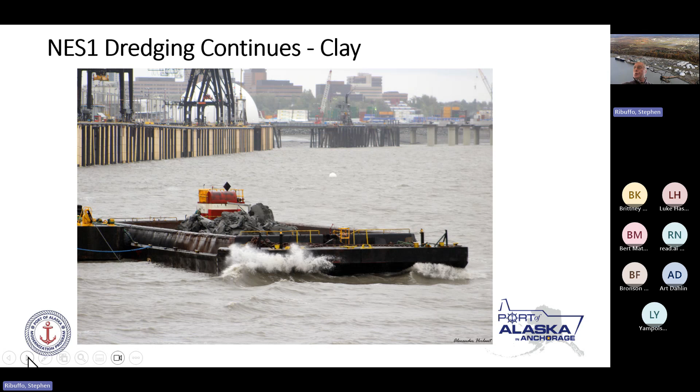Well, can I make a comment and ask a question? Can you confirm whether once this is done, it falls to the Corps of Engineers to maintain it at those depths? The Corps will maintain their area, but not necessarily what this is. So the Corps has a limit line, and the Corps maintains that line, but it doesn't go all the way to the shoreline. The navigation channel is where they will continue to maintain, but they don't go right up to the shore. Next slide. I should have asked it better.

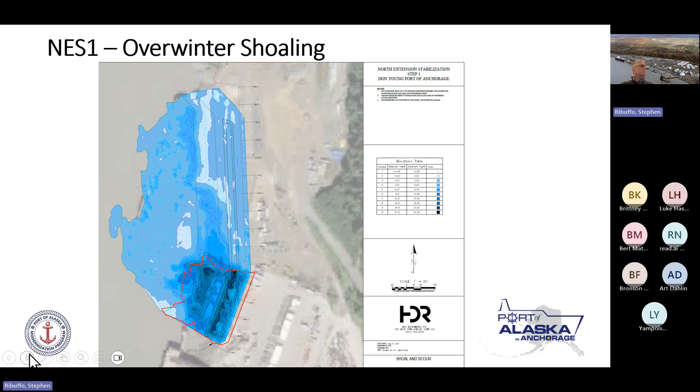Okay, next slide. So T1 schedule—here's a cute little picture that WSP put together for the T1. That's what it's going to look like when it's done.

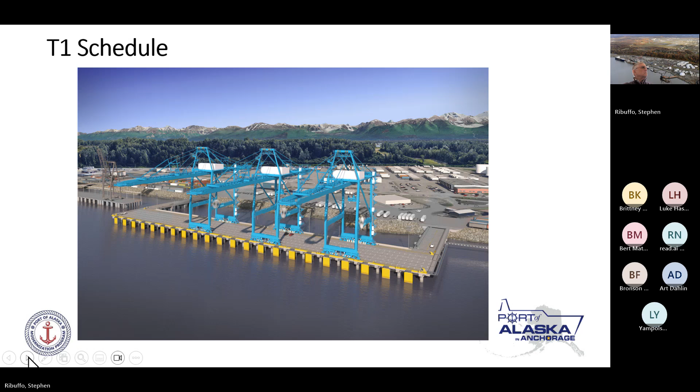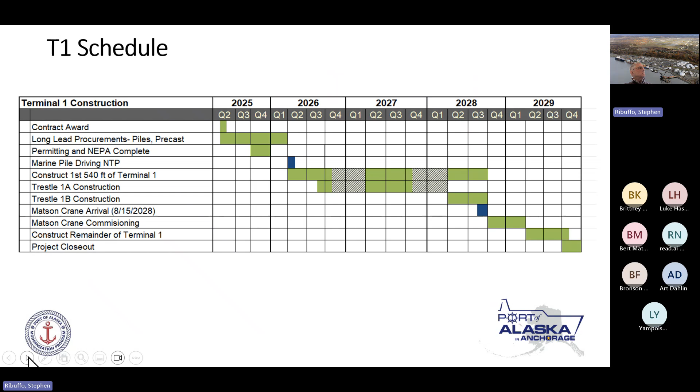We kind of talked about this already. This year we're doing submittals and ordering materials. Q2 next year they're hoping to be up here driving piles, and then they work for basically 4 years. Rough outline of that. Next slide.

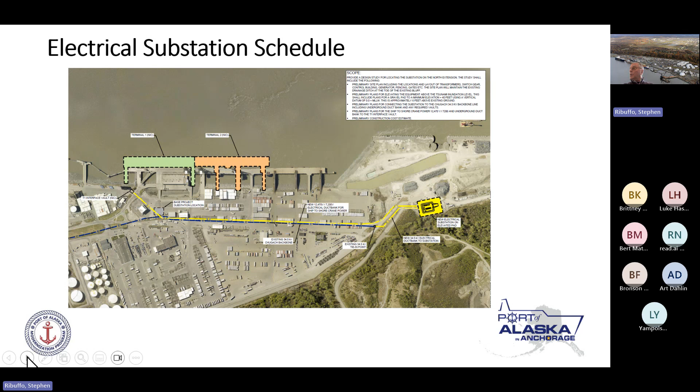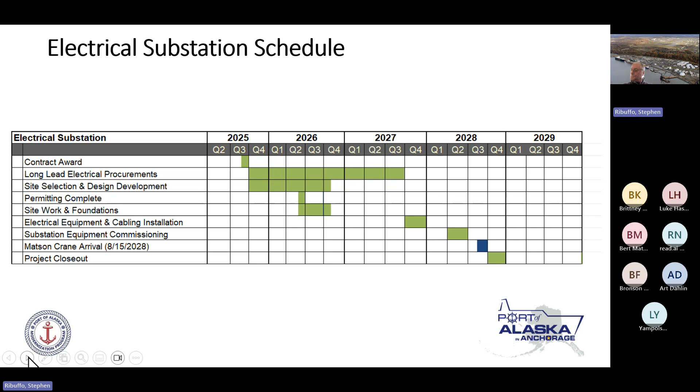And then here's the schedule for that. We're hoping to start, hopefully within a week or two. The first order of business will be ordering long lead time items, and electrical items are especially applicable to that, because some of that stuff takes 2 or 3 years to order and procure. Then the other part is the site development study we just talked about, so we'll start in on that right away. The actual construction can wait and lag a little bit because we're going to be waiting for materials.

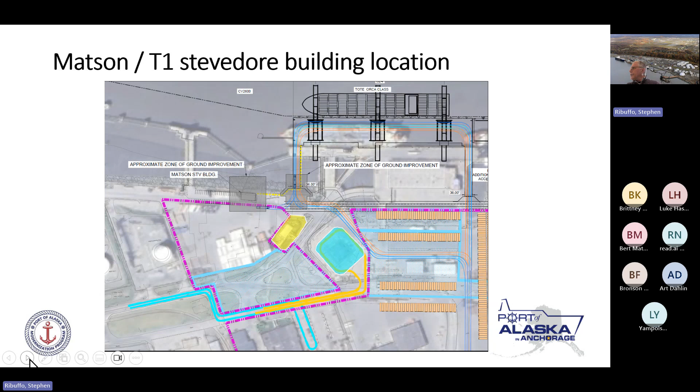When we decide on a location, we need soil stabilization because it's along the bluff and it's not stable otherwise. We also need to get a quote from the contractor for that soil stabilization, and that will be a design issue that will come to the board for a decision.

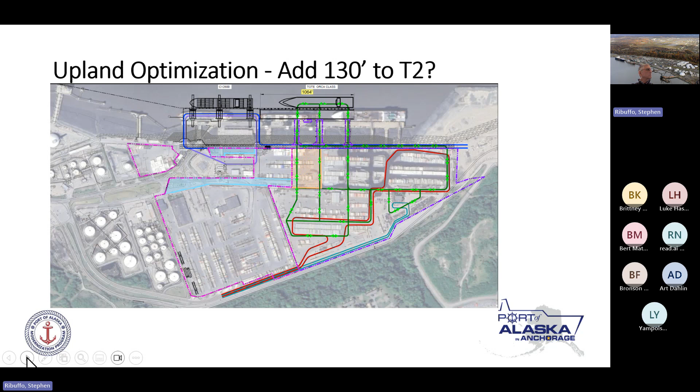But that would require a bump out to T2. So the next series we'll be talking a little bit about that. Next slide.

So if we did that, it aligns these ramps with existing uplands and traffic lanes, and it better accommodates a slight extension of the docks, and better accommodates the existing and future fleets. It would require a permit modification and additional funds for the dock portion, roughly 130 million. That's assuming we maintain the same standards for seismic and other things. There may be a way we could offset that if we come up with a different design standard.

So this is the TOTE and Matson current configuration, and roughly the approximation of their traffic patterns. You notice TOTE is way to the north, and Matson's in the middle.

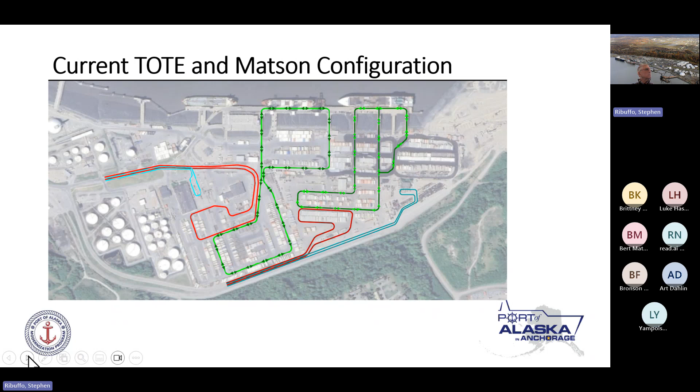This is the permitted condition, which is if we didn't change anything, we kind of move T3 over a full berth, and it's a 930-foot berth for them. The traffic actually kind of lines up with some buildings and other things, but the ramps do, so they're not really well aligned with the uplands. It's not the end of the world. It's doable—they could come off and make a right angle turn and go into the yards. It's possible, it's just not as nice.

John, are the uplands modifiable in any way? Absolutely. Okay, so one solution is we build a bigger dock. The other solution is we change the location of the road. Correct. Okay, and Art, you had a question?

Yeah, I would argue that a right turn off of the dock is not really doable. When we discussed the upland study, when Moffatt and Nichol proposed the previous slide, that does line up—that makes sense. Our initial feedback was that the right turn, the 90-degree turn, does not. So I would just caution saying it's doable.

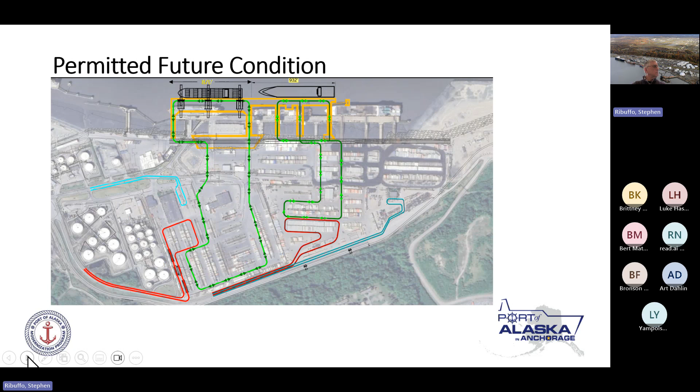And the plan is to give them a copy of this optimization study so they can have that. So if I could go—there's another, kind of went overboard on some of the slides here. Actually, figured this out earlier: if the trestle runs straight into a building, it feels like we didn't need an upland transportation optimization study to realize that you can't drive into a building. Like, how did we?

We thought this was a good idea to do this study for exactly that reason. You don't know what you don't know, and you don't know what's within the world of the possible when it comes to working with the users to change up the transit yard configurations, which can solve the problem before you have to do something more dramatic.

Either we change the plan for the dock environment. We knew there was going to be friction added by moving the docks, and we tried to minimize that. But now's a better time to be dealing with this than when you have a brand new dock and you haven't given that any thought beforehand.

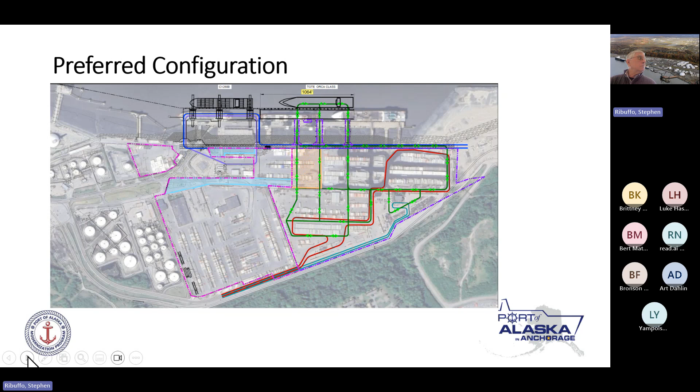So my background, I did a lot of harbor work, I did a fair amount of dock work. The idea of accommodating the fleet is a fundamental underlying principle. And it's interesting to look - I've got probably too many slides on this, I'll go really fast.

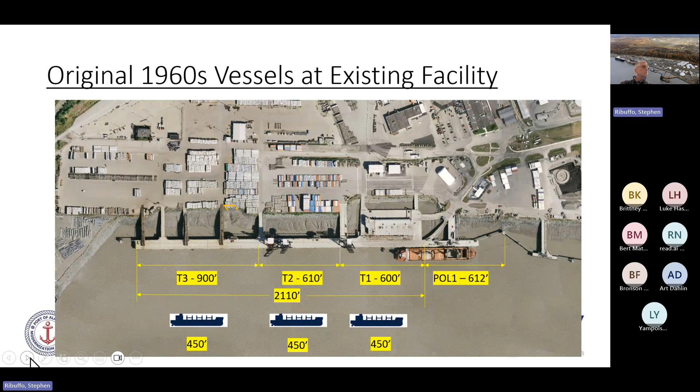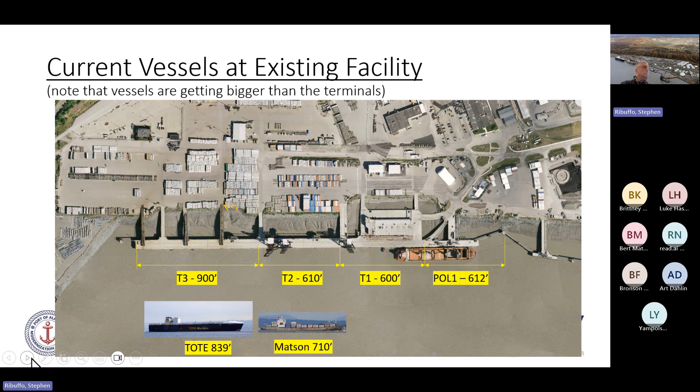If you look back at the history, here's our existing facility. The design vessels were 450 feet long. If you look back at all the plans, which I did, here's the length of each of the berths, and then our current vessels - TOTE does fit within the T3 berth, but Matson has overgrown it. We've also gone through a scenario where the port originally started down at the south and grew to the north, and they grew to accommodate the fleet and grow. So our existing berth length is 2,110 feet. The current permitted one is 1,800 feet, and if you go with what we call the study, the preferred one is 1,930 feet.

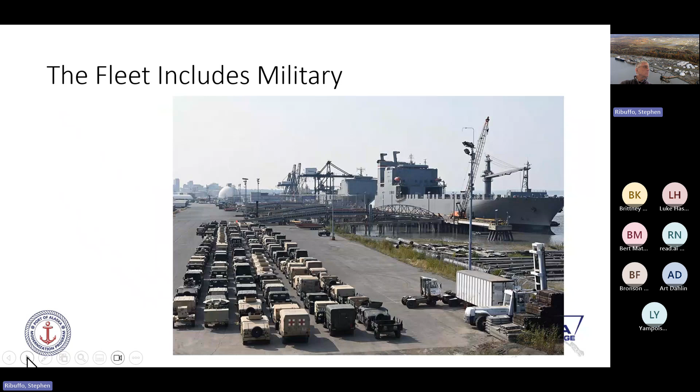There's a large body of knowledge on the fleet increasing. I looked up both TOTE and Matson along with others, and their fleets all increase. Your service life is 20 or 40 years, something in that range. Every time you build a new ship, it's bigger, every single time. And here's the series of vessels that are getting bigger.

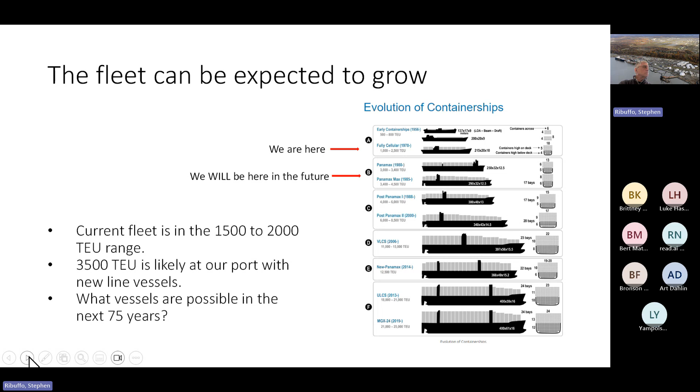I would say that the Jones Act ships are maybe a little bit one-off because they don't maybe keep pace with the international vessels quite as much, but it's undeniable that ships are getting bigger. Next slide, please. And so this really is what perked me to bring this up.

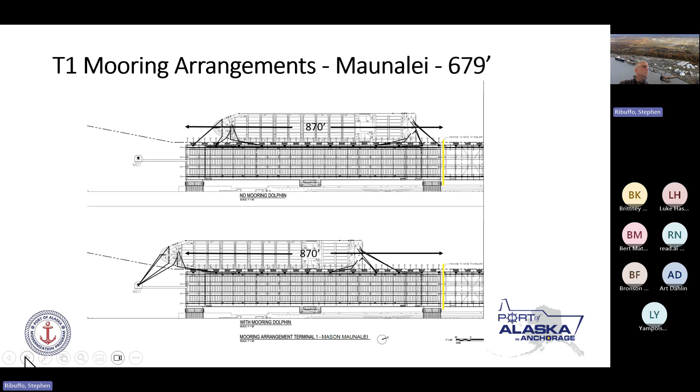These next series of slides are from the designer of record for T2, and they show the fleet on the dock. That was part of their mooring study. So this shows one of the current Matson vessels, the 679, and it works on T1. T1 is 870 feet. Next slide.

And of course, the cruise ships don't fit. If you put a 1,000-foot ship there, it takes up the entire dock, both T1 and T2, so there's no room for anybody else out there.

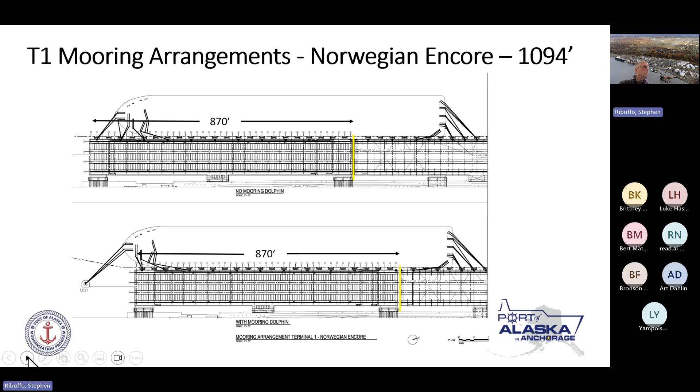And that the alignment that we showed for Tote is a better way forward. So when you look at a 75-year design life, that's where I come back to. I think it's at least worth a conversation to talk about these things.

Yeah, and we just need more definitive data from the designer so we can have an intelligent conversation. I mean, there's going to be trade-offs. There always are when you get into dollar costs that are this big.

This predates me, but did we not consider this when we determined the planned length? I mean, the cruise ship length does not change. It is what it is right now. And all the other existing ships in the fleet that we're talking about. Why we made a decision about the length of—I get that the upland study is new, so that raises a question about the uplands alignment.

Although then there we have potentially an uplands modification solution. What was our decision-making process when we made the decision about the length of the dock, acknowledging that we have these ships that use the facility that are longer?

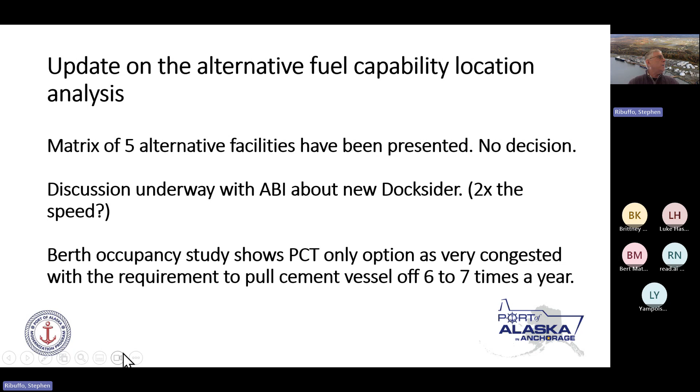Are we adjourned? Yes, we are. I'm trying to get out of the PowerPoint so I can formally shut off— yours is an easier move. Yeah, we'll have to have...

Art asked me the question in one meeting at the end of one of the IEOCs. I'm like, no, we don't have to move. And then he's like, are you sure? And he calls me up and I said, let me look into it, let me just get to T1 first. Then I looked through it, and at the next IEOC they ran into him, and I said, yeah, sorry, when I asked you I was too busy focused on trying to get T1 awarded.